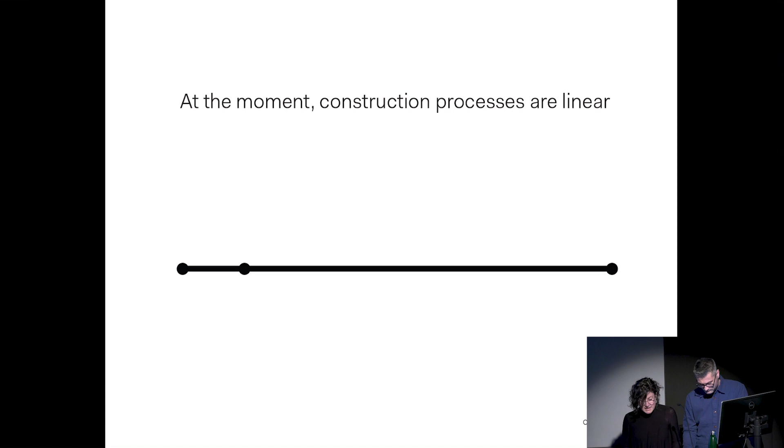So at the moment, construction processes are very linear. When something has reached the end of its determined usable life, it's discarded. Landfills are growing while resources are being depleted.

Construction and demolition debris is estimated to be nearly a quarter of the national waste stream. Annual C&D is expected to reach 2.2 billion tons globally by 2025. According to the EPA, it has increased 342% from 1990 to 2018. We tend to think of what we throw away as going elsewhere, but the fact of the matter is that we all share one planet.

And the junk that we discard here in the developed world disproportionately affects communities that are contributing hardly anything to this mess. There are no carbon taxes for the most part. It does not cost to waste. And as such, tearing down and starting over is still mostly cheaper than reusing existing structures.

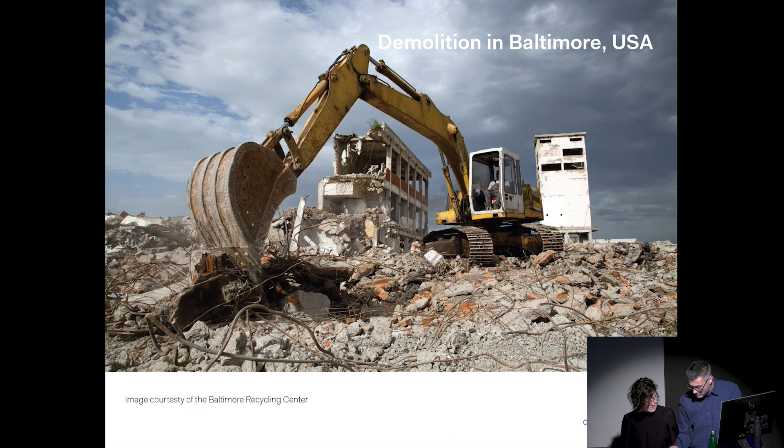Meanwhile, the energy embodied in making materials for new buildings around the world, mostly steel and concrete, accounts for about 16% of global carbon emissions. Embodied energy includes the entire life cycle of a material, from the extraction of raw materials to the manufacture, transportation, and installation of products at the building site. Cement production, which is a key ingredient of concrete and its most carbon-intensive ingredient, has increased almost 30-fold since 1950.

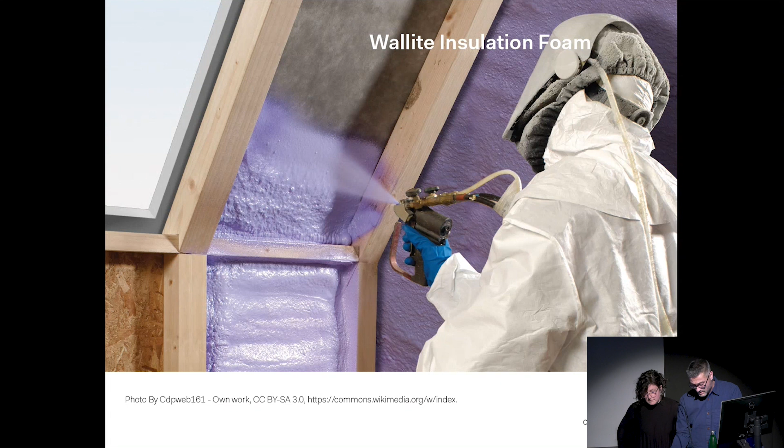Our industry is coming around to realizing that operational energy needs to be reduced, but it's often assumed that the embodied energy of a building is small compared to the energy used in operating over its lifetime. However, assuming a normal operating efficiency, the amount of energy needed to build a house equals the amount used in operating it for about 20 years.

In other words, if the house lasts 20 years, the total energy consumed is about half from building it and half from operating it. The conclusion we draw from this is that it's essential for us to pay attention to both embodied and operational energy in order to have a real impact.

We have to design our buildings to operate at zero or as close to it as possible. There is no doubt about that. But in doing so, we need to pay attention to how we are achieving this goal.

If we build a new passive house that operates at, say, 10% of a standard building, but there's an entirely new masonry structure and achieves its efficiency by packing it full of foam and spraying inside with spray foam, we're missing the larger point. Foams are petroleum-based, and eliminating the extraction and use of petroleum will be critical in reaching carbon emission goals, the toxicity of the stuff aside.

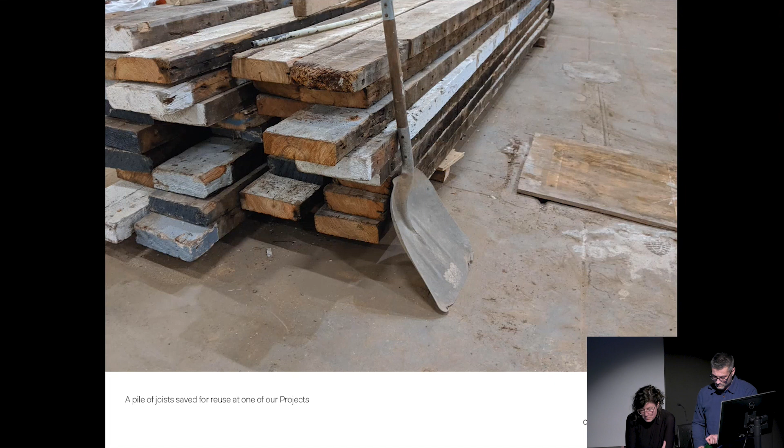As we carefully take buildings apart to fulfill new uses and to improve their operational energy, we really need to be aware of what we take out. Where can it go and what useful life does it have left? Maybe another industry can use it if the building industry can no longer.

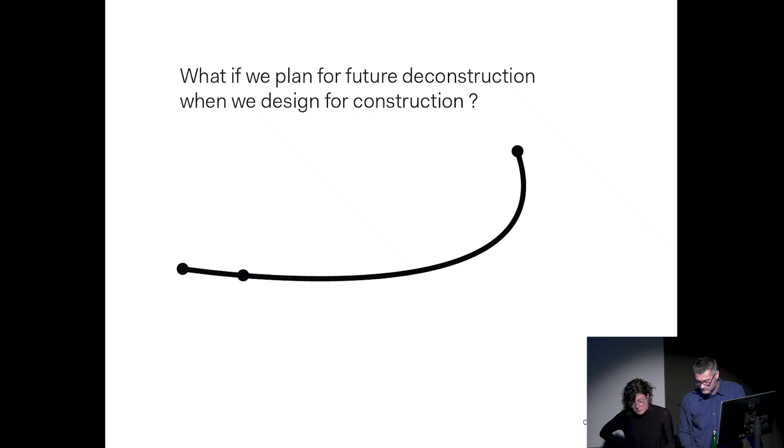And then ideally, if we take a step further and start thinking about demolition and deconstruction when we plan for things, if we start realizing that nothing we design is permanent, and we start planning for this impermanence, and we design in such a way that we're already pre-anticipating things to be taken apart into their component pieces...

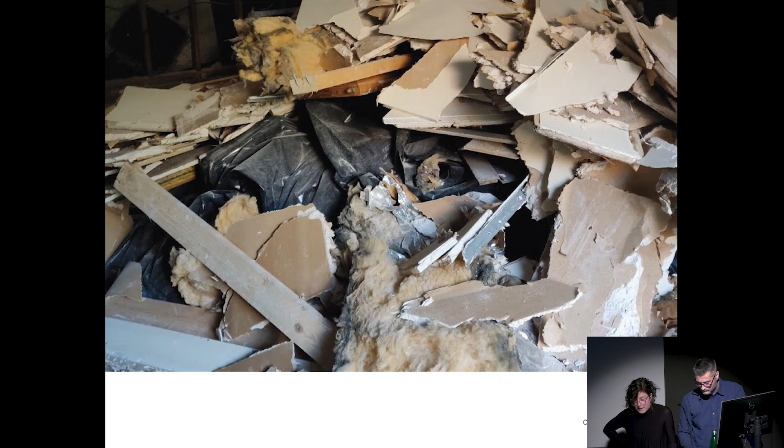Then maybe instead of this big mess, every time we want to move a wall, we can conceivably plan for this wall to come apart and be shifted, taking it apart and putting it back together again in its desired spot. And so if we start planning for deconstruction and adaptation, we can start closing this loop and ultimately reform our current linear practices into circular ones.

The building was in bad condition when we first toured it. It had been compartmentalized over time, but to our client's huge credit, he was able to see its potential and bought it to convert to theatrical rehearsal studios.

To celebrate the wood and masonry character of the building's interior, we chose to insulate the building from the exterior. This allowed us to expose the existing material's warmth, texture, and history of use. We even left intact the construction spray paint annotations that were exposed during construction. This decision reduced the need for interior finishes, significantly reducing the amount of drywall and paint that a project of this scale would normally have.

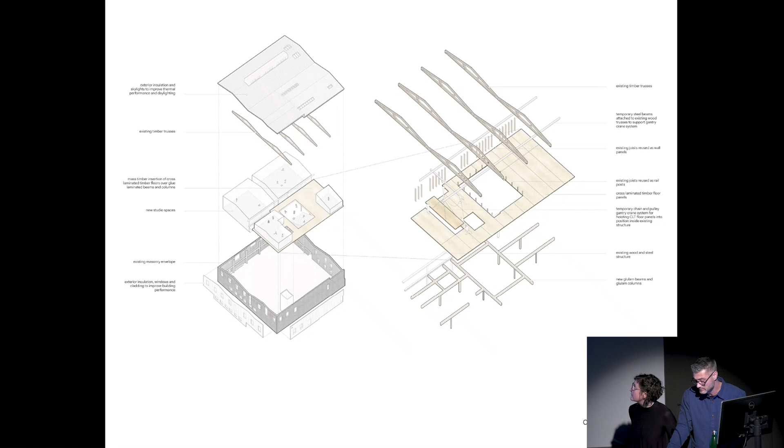The building's existing material palette, especially the existing wood elements, became a very primary part of the interior. We left the existing heavy timber trusses exposed in their original finish. Any existing structural lumber that was removed in creating the double height space you see here, and inserting our CLT atrium floor slab, was carefully removed and stacked for reuse.

So in looking at it as we were taking it apart, we discovered that all the structural lumber in the building appears to be longleaf pine.

This tree once covered 90 million acres of the US from southeastern Virginia to eastern Texas. Some of the trees were 3 centuries old when felled, dense and durable and saturated with resin that makes them unusually resistant to rot and insects. In the decades before steel began to dominate, longleaf pine was the strongest building material around.

The only way to find this original strength longleaf pine these days is precisely in this type of building - manufacturing buildings built around the turn of the last century, in the big cities on the East Coast. Sadly, clear cutting of the vast southern forests in the late 1800s wiped the entire range of original growth hard pine out. There's maybe 2% left. So today, this material is a rare sunken treasure.

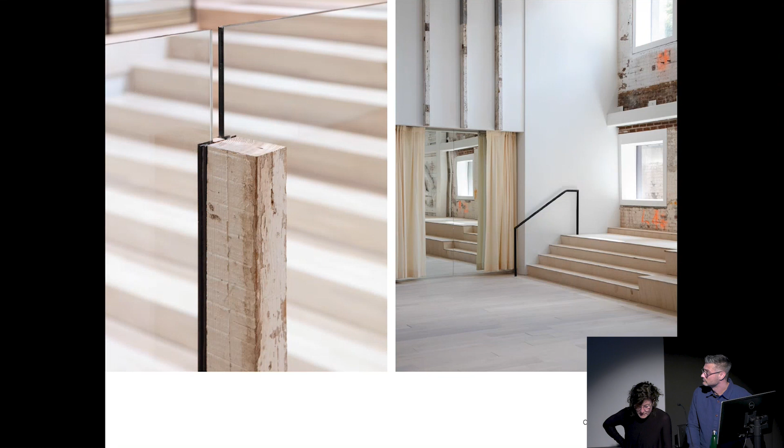We reused as much as we could in what we took out - in the wood posts that surround the bleacher opening, and to divide up acoustic paneling in the main assembly space. Everything was cut down in place. Existing finishes were flaked off and largely retained and encapsulated with a clear finish. Everything we could not use was picked up by a local reclaimed woodworker who made flooring, paneling, and other things out of it that will find its way into other Brooklyn homes, hopefully.

If you think about all of the carbon that is stored by these old logs, keeping them on site was really the best thing we could do, both to honor the old trees and to ensure that the carbon remains stored on site for hopefully another decade and beyond.

This is a diagram we made to show the carbon capturing potential of these old growth forests. These old trees only exist in our built environment now, and we should never, ever have them end up in our waste streams.

We're also showing the potential of reforestation if we move towards building anything new with wood.

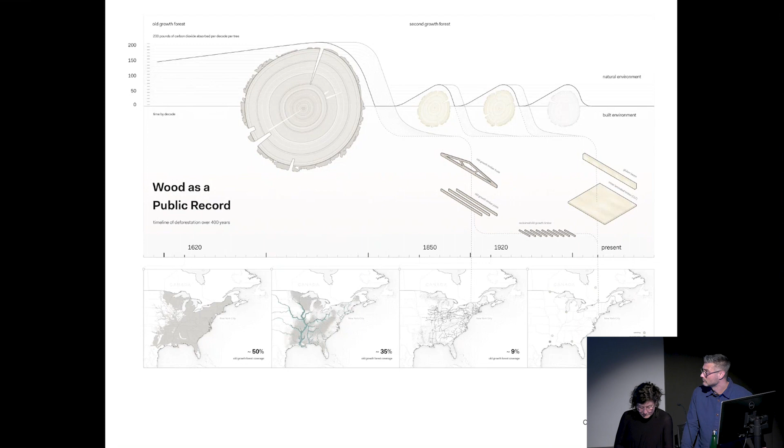There's a quote by Joan Marc Simon, the director of Zero Waste Europe, that really resonates with us: There is no such thing as sustainable products or food. There are only sustainable systems. In nature, the sustainability of ecosystems is not related to the qualities of the parts, but rather how they interact with each other as a whole.

So as designers, we need to start focusing on the broader systems of the elements we specify. The journey of our resources matter, and the only way to reach sustainable and dare I say regenerative design is by paying attention to and closing the loop on our linear practices.

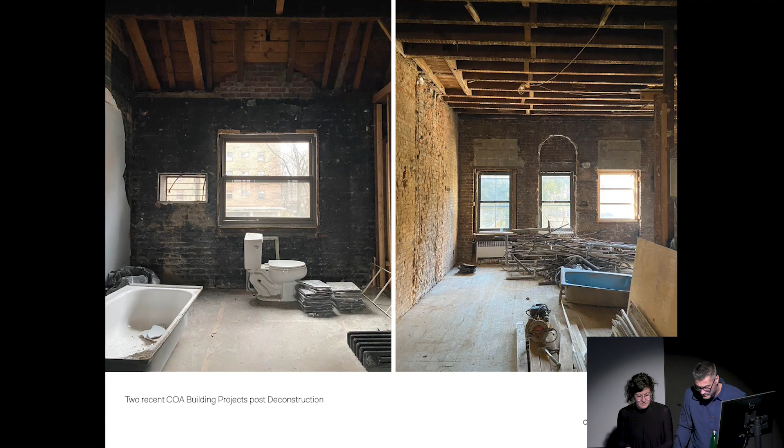Last year, Coadaptive launched a construction management arm, Coadaptive Building. Our desire to start an architect-led design build arm was in large part informed by the fact that we want to have more direct impact on the material waste streams of our projects.

Prioritizing careful deconstruction rather than demolition to ensure that whatever is removed is either reused or sorted for up or downcycling.

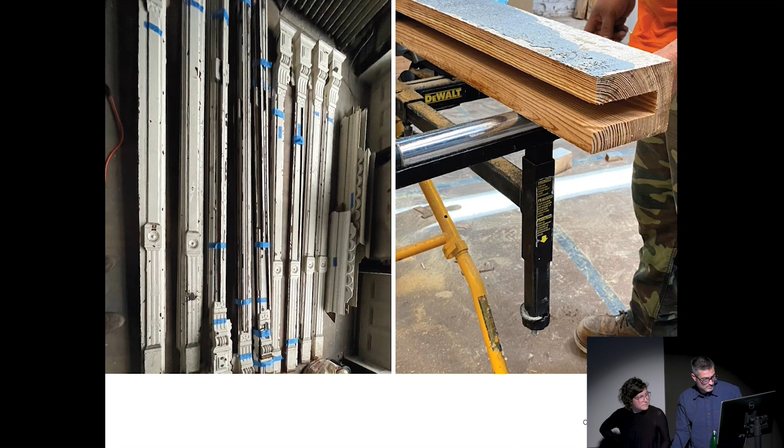Much of what comes out may still have usable life in it. One woman's trash is another woman's treasure.

For items such as cabinetry, appliances, plumbing fixtures, or radiators, we partner with organizations that collect these elements for reuse, and we're able to provide tax donation credits to the property owners, often offsetting the additional cost of the deconstruction. In many cases, it saves money over demolition, we're finding.

The larger members can become new architectural features, and existing details can be saved for reinsertion. Smaller elements can be separated by type to be downcycled for a new use.

Some examples: we've taken joist sets from projects and partnered with local lighting manufacturers to make lights out of them. We've ground down tiles from projects to make terrazzo.

So there's a lot of... This photo on the left just shows us carefully removing all of the wood details, which are made of Adirondack pine, and then we are stacking them in a tent in the backyard of that house, and then we'll reinsert them at the end of the project.

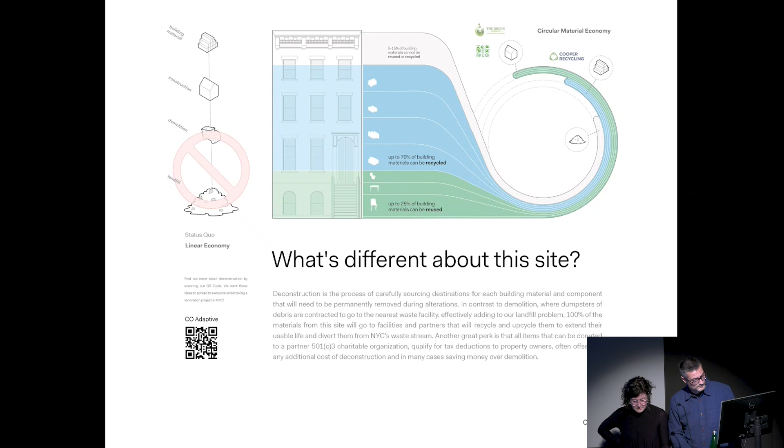So we feel that if we start moving towards a circular system, we can start conceptualizing borrowing man-made materials rather than owning them outright. Our metaphor for the city or the building as a material mine really becomes that of a material library. If manufacturers are held accountable for the entire life cycles of their products, it would increase maintenance and quality of the products, and it could change the economics of ownership and lead to more access and affordability in construction.

Did it? Will we skip one somewhere?

So as you can maybe tell, we're really passionate about this subject, but we're still ourselves on the path of discovery. So we're really excited to hear Adam's lecture, and also to hear your thoughts and comments.

And we encourage you to never stop questioning the system we find ourselves in. As the next generation, it really is your job to question the status quo and to hold our older generation accountable for the way we're doing things now.

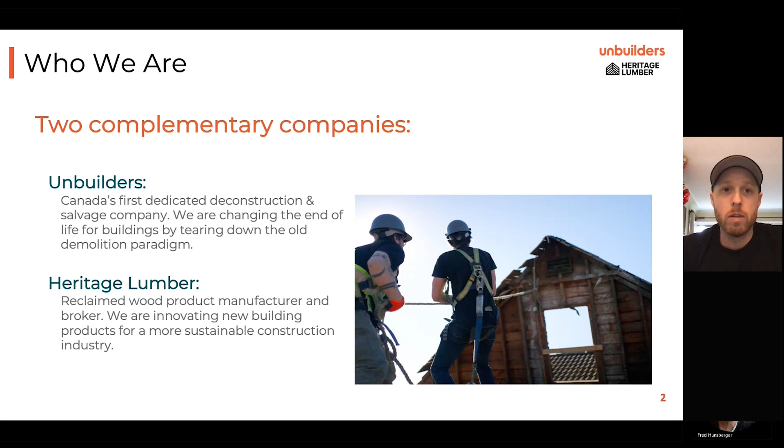In most regions, this is anywhere from 25 to 40% of the total waste from construction demolition. In most of Canada, it's around that 40% mark. That translates to 600 million tons, which is what the EPA predicts in the US alone. The Canadian number is only 4 million tons, which shows it's highly under-recorded, because it should be closer to 50 million tons.

When you look at that material, when it goes to a landfill, it decomposes into methane and is released into the atmosphere. It's translated into 1 billion tons of CO2 released every year. So this is a massive contributor to climate change and global warming.

Breaking down that waste, 40% of it is just pure lumber, which should not be going to the landfill. It should be either recycled or salvaged, really. That's about 240 million tons of lumber every year in Canada and the US going to the landfill. That has a raw material value of $262 billion.

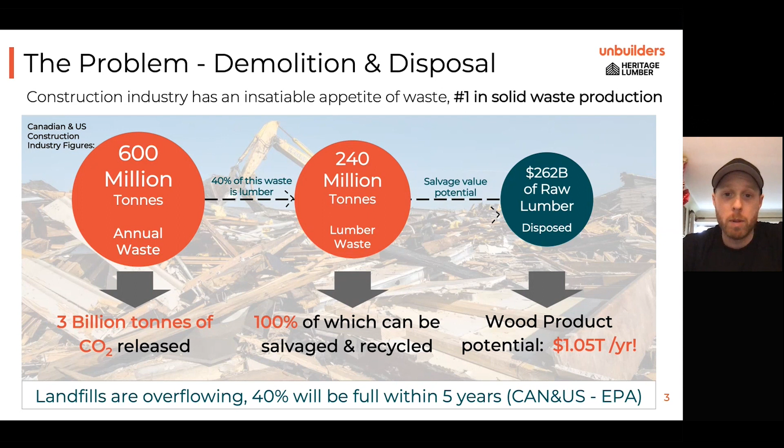When you put that waste into context, it's the equivalent of about 6 million homes a year that are landfilled just from the construction and demolition industry. So this is not a small problem. This is enormous.

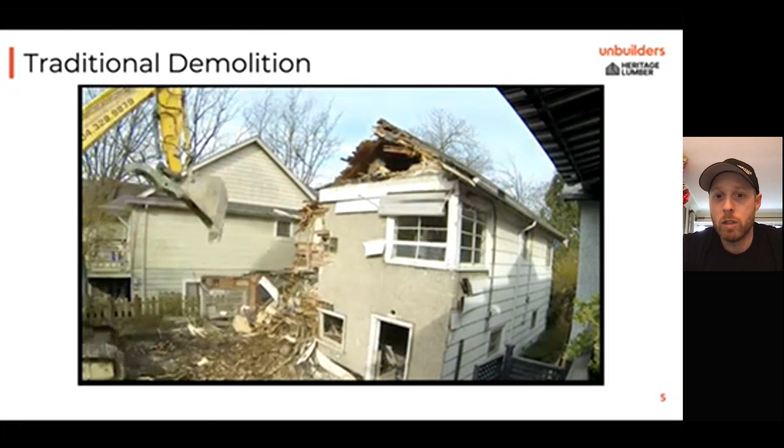Traditional demolition, for everyone in the room, I'm sure they're well aware, really lacks any separation of materials. It's fast, it's cheap, traditionally, though that is thankfully changing with some policy changes. And it wastes all the resources because you're left with a mixed load of materials, which you cannot separate after the fact. The cost is too great, so this has to go to a landfill.

Now I'm going to mention something that was passed here in Vancouver, just to lay the groundwork for where policy is going and what good policy and bad policy can look like. Vancouver was the first in North America to pass a green demolition bylaw in 2014.

Since then, some American cities in particular have surpassed this bylaw by a long shot. And there's now the District of North Vancouver and City of Victoria, who have taken the hard lessons learned from Vancouver's bylaw and made a much better one.

But essentially in Vancouver here, they introduced this bylaw, which is more of a recycling policy. Houses pre-1950 have to hit 75% recycling content, and ones that have been deemed to have heritage qualities have to hit 90% recycling. And all pre-1910 homes are supposed to salvage at least 3 tons of lumber, which is really not very much in a house.

So this seems on the surface like a great progressive policy, and to some degree it has moved the needle a little bit. But the reality is the industry, any industry, is going to find the least path of resistance and the ways to change the least and still achieve what the policy requires. So really what's happened in Vancouver is we've got private landfill recycling facilities that are marking receipts as recycling, but the material is all going to the landfill anyway.

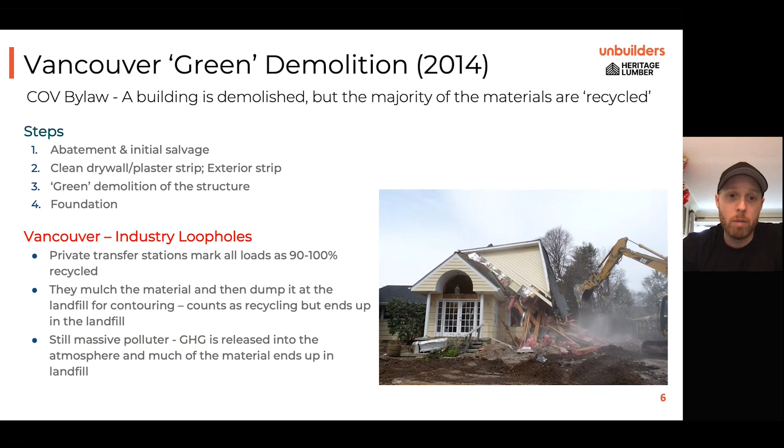Demolition contractors are hitting their compliance targets, saying they're recycling all this material, and it's still actually going to the landfill. The other thing counted as recycling here, which is where our unsalvaged wood goes too, is it's usually mulched up and then incinerated for energy, or worse, just incinerated in general. That's currently counted as recycling. In my opinion, it needs a warning label because it's still releasing greenhouse gases into the atmosphere.

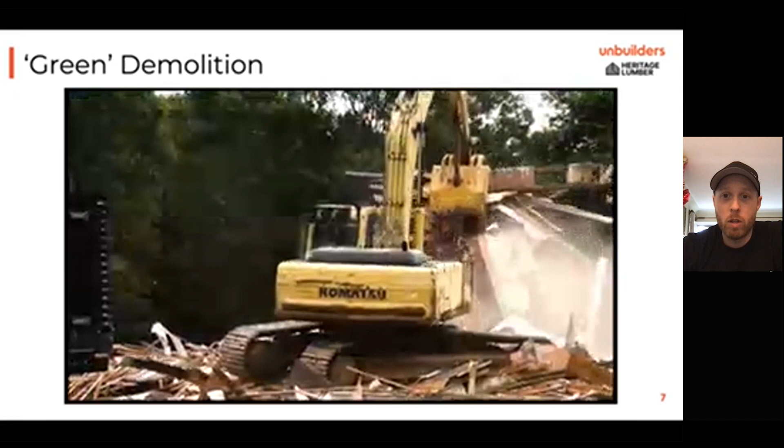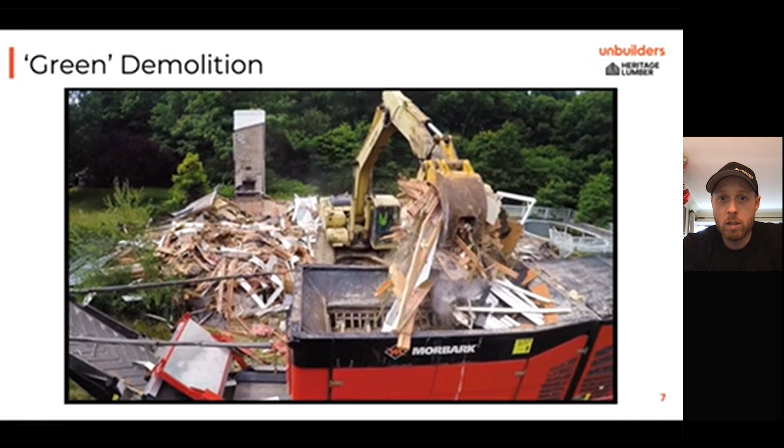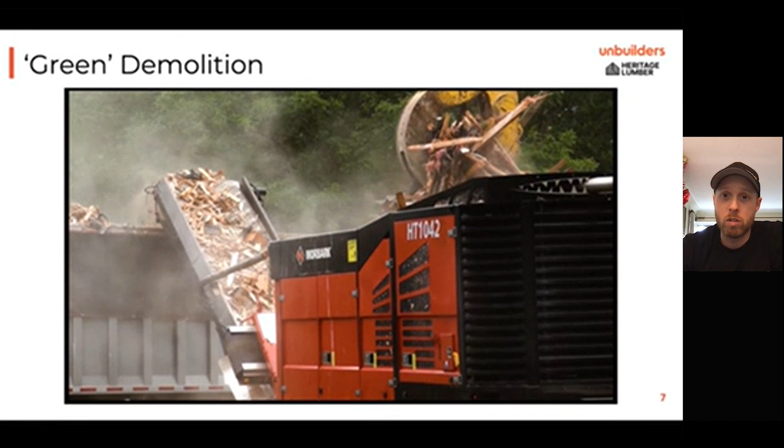So this is what so-called green demolition looks like. It usually doesn't happen all on site like this video shows — it's just an effective video where the material is still mixed primarily, and then it goes to a facility where it's chipped up, mulched smaller like this, and then it's either incinerated or brought to the landfill and counted as contouring material, basically filling in the gaps of the landfill. In Vancouver, they consider contouring material a recycling stream, which is literally going to the landfill.

In 2021, we diverted over 3,000 tons from the landfill, and we've hit 99% salvage and recycling on multiple houses. Our average for building deconstructions is about 90 to 95% waste diversion. Heritage Lumber then takes the lumber. We've got partnerships with Habitat for Humanity and the Reuse People, who take all the non-lumber goods, and the owner gets a tax receipt for that. The lumber is purchased by our other company, Heritage Lumber, where we manufacture a variety of products and sell raw material.

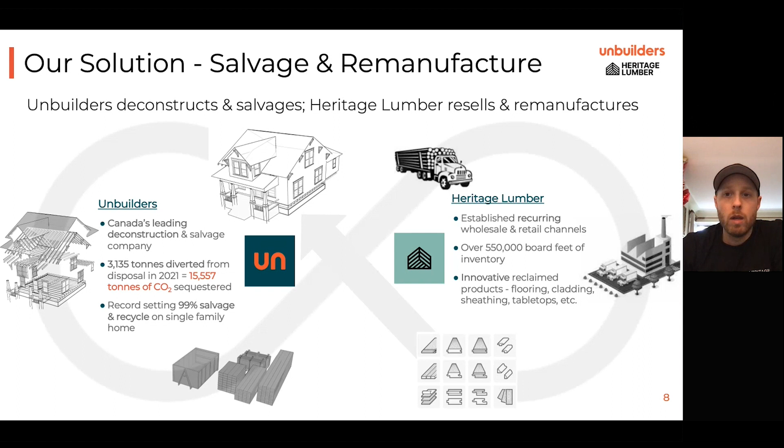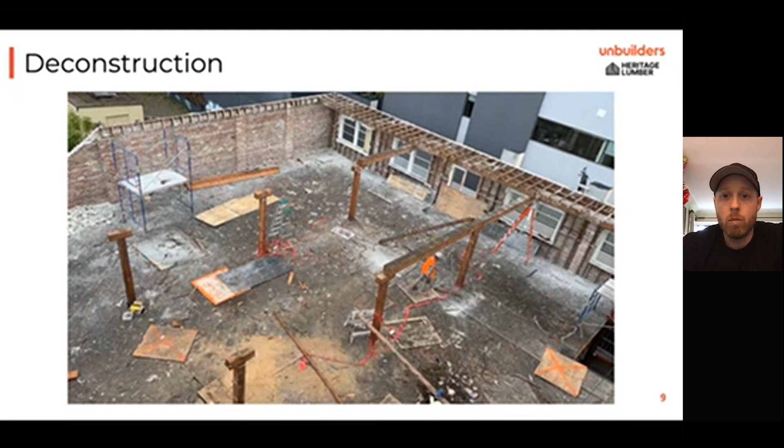The impact from deconstruction is enormous. As I mentioned, 90 to 95% waste reduction right off the bat. So that's going to be big.

The other thing that's been quite interesting over the last few years, but really over the last few months, is that in British Columbia there have been multiple lumber mills closing because they don't have enough wood fiber to produce lumber or plywood anymore. The combination of forest fires and the pine beetle have decimated the forests here, so mills literally can't get enough trees out of the forest to keep them open. Now there's also thankfully been new regulatory changes to cease the logging of old growth.

The Pacific Northwest has a similar number to the East Coast — less than 2% of our intact old growth is still standing in the forest, and it was still being logged. It is still being logged in some areas, but they've put a halt on that for the most part in the last few months. All those factors combining are leading the mills to be short of lumber and therefore closing.

Meanwhile, we're disposing of old growth lumber at higher and higher volumes every day as the demolition industry continues to grow. So we're trying to really show the connection between those two, not only to policymakers but to the industry as well, because we don't need to log the old growth anymore — we just need to start deconstructing.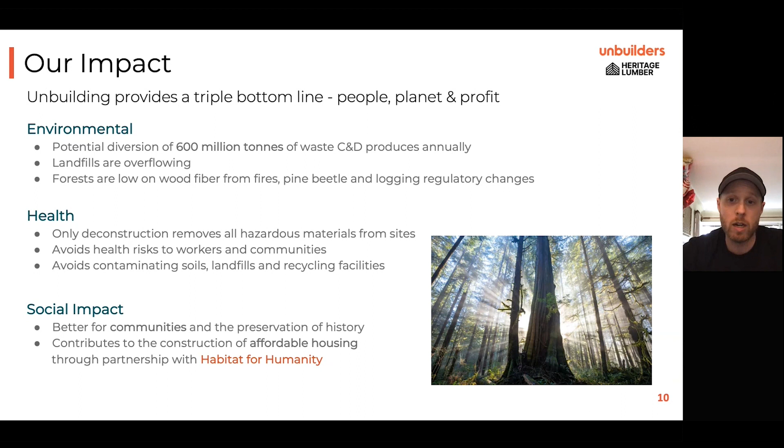Now getting into the materials themselves, more on the heritage lumber side. As I mentioned, the materials are typically old growth coming out of these buildings. In the Pacific Northwest, buildings built right into the 1970s were still utilizing old growth for everything down to the 2x4s. There's less than 2% of this material still standing, trees as old as 2,000 years on the West Coast. The only place to get this lumber now, with the ending of old growth logging, is to deconstruct it and pull it out of old buildings.

Vancouver is one of the youngest major cities in the world, only founded in 1886, but it was built with ancient trees. So the history here is not necessarily in the buildings themselves, but in the materials, which were stewarded and protected by the First Nations before colonial times.

Now there's a lot of benefits to reclaimed wood. It has 92% less embodied carbon than new lumber, making it the greenest building material on the planet. So for architects and designers looking to build sustainably, anywhere you're looking to put wood into a project, if you can replace it with reclaimed wood, you're instantly reducing that embodied carbon by 92%. And old growth lumber in general is about three times stronger than new lumber, so it's actually a better wood.

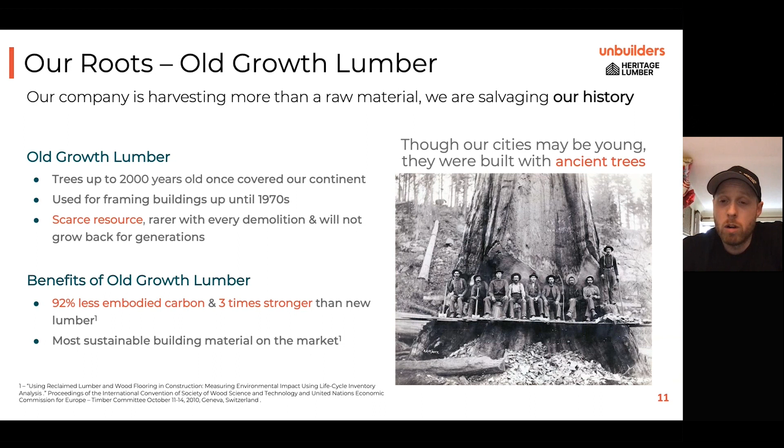Current construction is designed for waste, and this is a major issue. It's the biggest reason why I, with a background as a builder, transitioned into unbuilding and building reclaimed wood products. I was building passive houses, and we were utilizing building methods I didn't agree with, so I transitioned out of building and will eventually get back into it over time. But there are a few main areas leading to current buildings not being deconstructible.

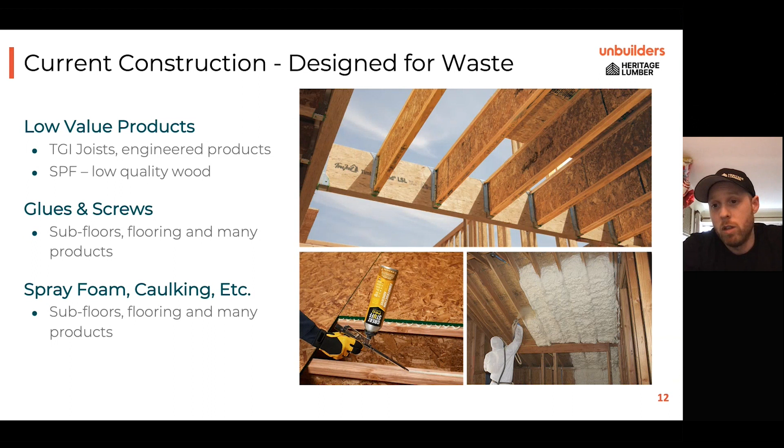The first is that the materials are actually lower value than they used to be. We're using a lot more engineered products, like OSB over plywood or shiplap solid lumber, and these materials have low value in the resale market. On top of that, they're typically glued and screwed together, so you can't separate them and really can't salvage them in whole. The last thing is spray foam and caulking, which is really the enemy of deconstruction. When you use spray foam in large areas, you're rendering all of that material unusable again.

Heritage Lumber, our other company, currently makes an array of products at our mill — wide plank flooring, ceiling cladding, beam wrap, tabletops, countertops, mantels — and we sell materials to custom wood shops doing custom projects. We've also recently partnered with a company to manufacture modular construction using our materials and lumber.

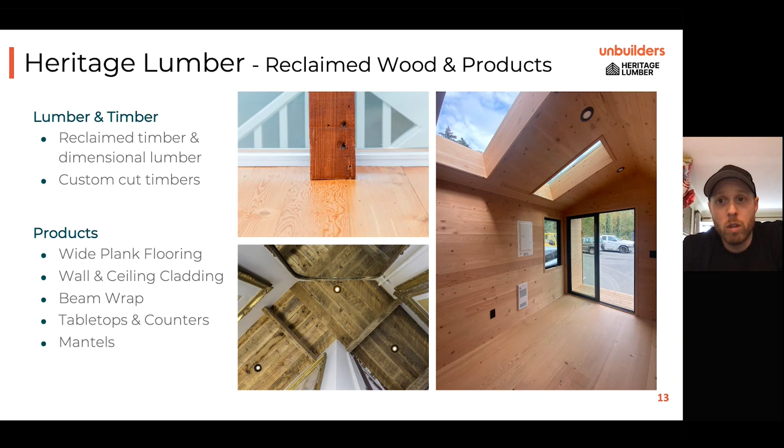A few months back, we acquired our biggest local competitor and partner, Western Reclaimed Timber. We're in the midst of co-branding the two companies into one. We did this to start manufacturing in-house and grow on our site in Maple Ridge. The acquisition came with the previous owner, Bruce, who has 35 years in the industry — a wealth of knowledge, an advisor and mentor to me — along with experienced staff. It's a very exciting move for us to grow upon.

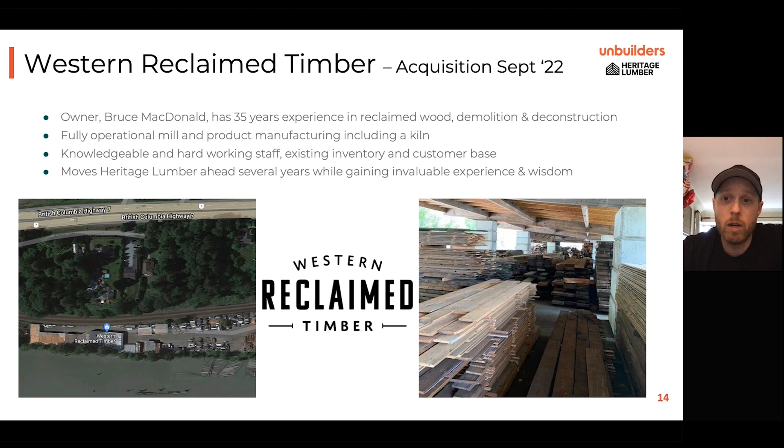Two recent partnerships are also exciting for our company. The first is a furniture company called Natural Pod, building sustainable furniture. We're in the midst of transitioning their entire supply from FSC certified plywood and lumber to our reclaimed wood and reclaimed plywood, which we're currently R&Ding and have in prototype stages. The second is Hewing Haus, a partnership with a modular builder.

The unit pictured here is built entirely from reclaimed wood, aside from the electrical, insulation, membranes, windows, doors, and roofing — reclaimed siding, framing, interior and exterior cladding, flooring, and even the furniture inside was all reclaimed wood. Where we're leading the company is to partner with more prefab builders, builders, and architects to start seeing reclaimed wood in higher volumes in new buildings and construction.

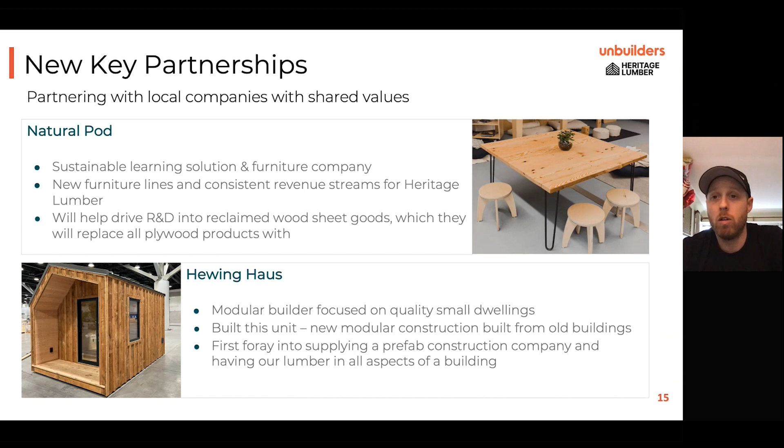This year we're coming out with new products. We're currently doing an investment round to raise money to launch these new product lines, for which we already have buyers for some. The sheet goods pictured in the top two pictures are a 3/4 inch plywood, 3-layer cross laminated ply — solid reclaimed wood. As far as we can tell, it's the first on the market of this nature.

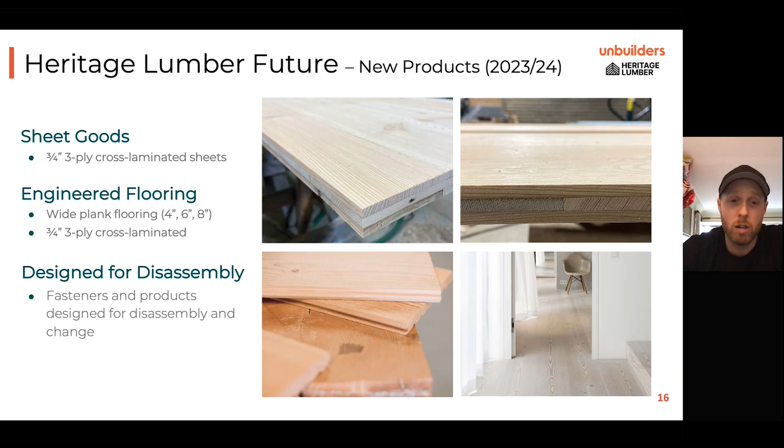We're also scaling our flooring to become engineered flooring as opposed to solid flooring, to stretch our lumber further. Lastly, more next year and into 2025, we're looking at installation systems for all our products designed for disassembly, so our products can come back out just as easily as they went in.

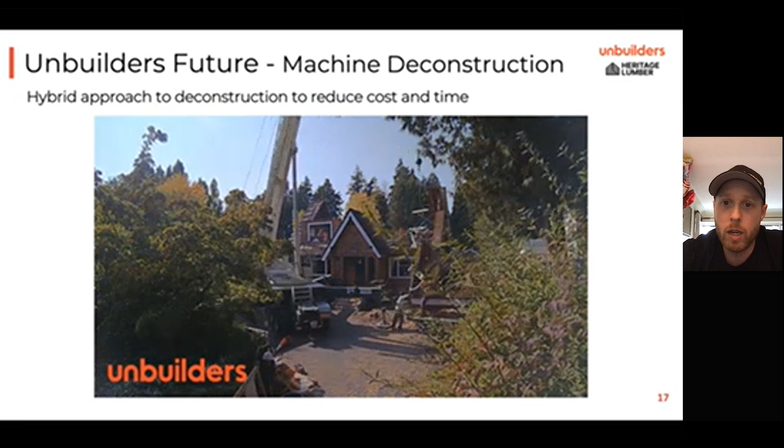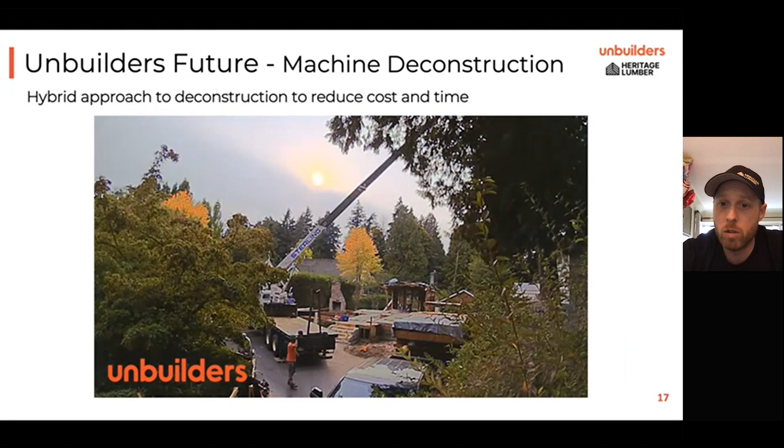In terms of the future of deconstruction, this is a residential project we did with a crane. We're doing a 3-house land assembly in Kelowna right now with an excavator, where we're going to do something similar to this video — really pull the building apart in big sections. So it's sort of the reverse of prefab construction.

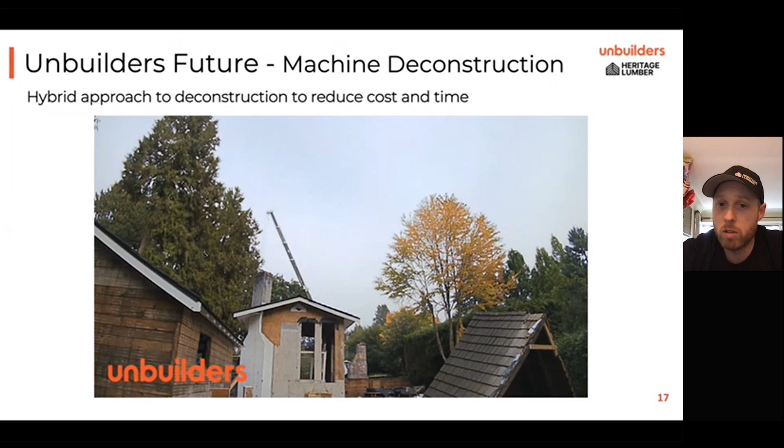The reason we're trying to transition into this is to speed up the deconstruction process and reduce its cost. That's our biggest barrier to more work — deconstruction takes more time and typically costs more money. We have business models that combat some of the financial side with charitable partnerships and acquiring the lumber, but it still does typically cost more and take more time. We're also working with policymakers to try to incentivize deconstruction and material reuse, as opposed to just penalizing demolition.

Looking forward, at least where I see the industry going over the next decade, is really deconstruction replacing demolition. I think that's already occurring in a lot of cities in Canada and the US, and that's going to spread — seeing more salvage materials in projects, getting over the hump of seeing them as used products and instead as a second life, which is more sought after. And also building in a way that products and buildings can be reused and designed for disassembly.

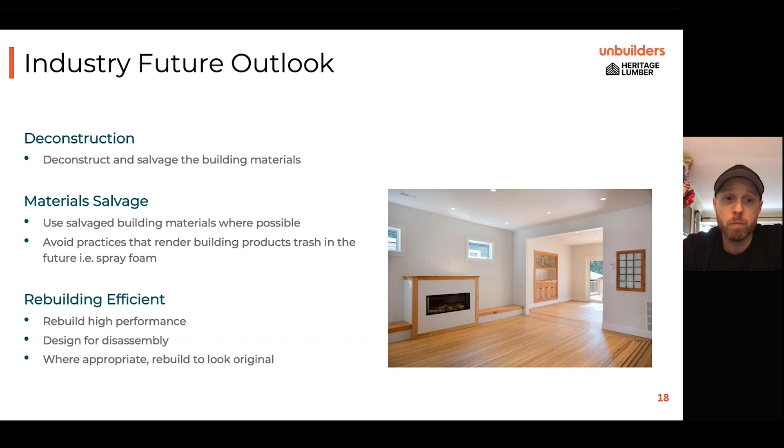Our tagline is, 'It's not waste, it's just wasted.' In a visual way, you can see where the industry needs to transition and is transitioning, with us leading the charge here in the Pacific Northwest.

Thank you so much. That was so exciting. All on the edge of our seats. There we are. Now I don't know how to... Hi.